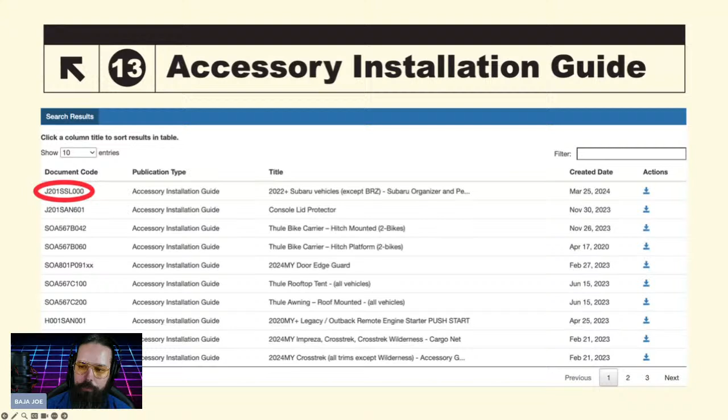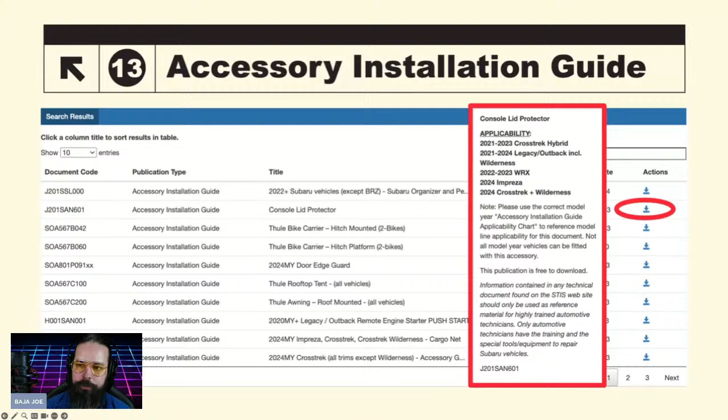For the accessories, the document code is the part number. So if you buy a particular accessory, let's say a trailer hitch, just put the number of the part up here and it'll start auto-populating what you need right there, on the fly, without hitting the return key. Then you can hit the blue down button, and that is the download. It'll download straight to your computer as a PDF file, and it's yours to keep—there's no licensing for it. Also, if you hover your mouse around the download button, you'll get a dialog box that pops up with a quick bit of information about the applicability to the vehicle and a little summary of what's going on.

All right, so I filtered down the results to owner's manuals. There it is, 2024 Outback Owner Manual. We're going to go ahead and click on the down button, download it, and let's open it up. Let's talk about the other things too.

This is really good in case you buy a used car. Sometimes you buy a used car from wherever—Facebook, Craigslist, OfferUp, five and dime shops, buy-here-pay-here—and the documents for your vehicle may not be in the glove box where they belong. So here you can find all the missing supporting information. You get your Starlink owner's manual, a quick start guide, and a quick start guide for how to use EyeSight. EyeSight is our ADAS system, our assisted driver system with the stereo cameras. There's some really cool features with EyeSight that make the driving experience better, and it has instructions on how to turn off some of the beeps and boops so you don't have to hear that thing every time you take your eyes off the road.

So we're opening up our owner's manual right now. Let's go ahead and take this from the perspective of a service technician. A car comes into the garage and the customer says, 'Hey, my remote start doesn't work.'

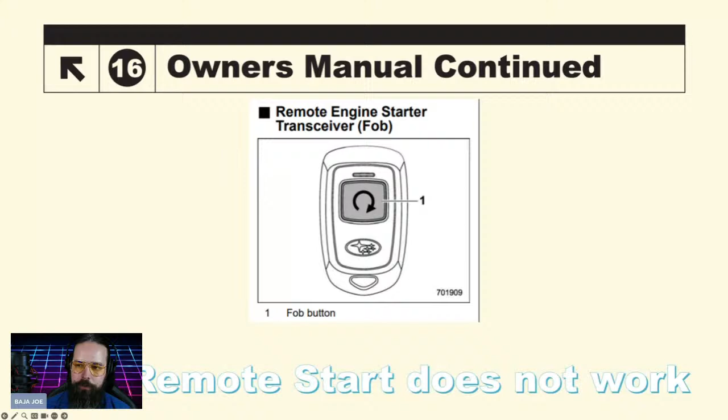With this particular type of remote start, it actually says to start the engine with the remote engine start system, briefly press the lock button twice within 2 seconds. This is the push button start key fob - it says you've got to press the lock button twice, then press and hold it for 3 seconds. Over here, with this one, you just press it twice fast and your car will go beep beep.

There is a third option to remote start the Subaru systems, but it does require a Starlink subscription, and now you can do it from a phone app. A lot of the newer Subarus are giving out a 1-year subscription of Starlink already, and then the customers get their remote start and they're like, 'Hell yeah, I can do it from my cell phone.'

Then the 1-year subscription runs out. They think the emails they're getting from Subaru are junk mail, they delete them, and then they come into the shop and say, 'Hey, my remote start doesn't work.' And a lot of technicians start looking around, thinking, 'Well, maybe your remote starter module is bad.'

Well, in order to do the remote start from this key fob, you need a module. But if you want to do remote start from your phone, it just piggybacks off of the telematics, which is Starlink, and there is no module. So all these customers that have been buying cars for the last 3, 4 years are remote starting through their cell phones. They love it.

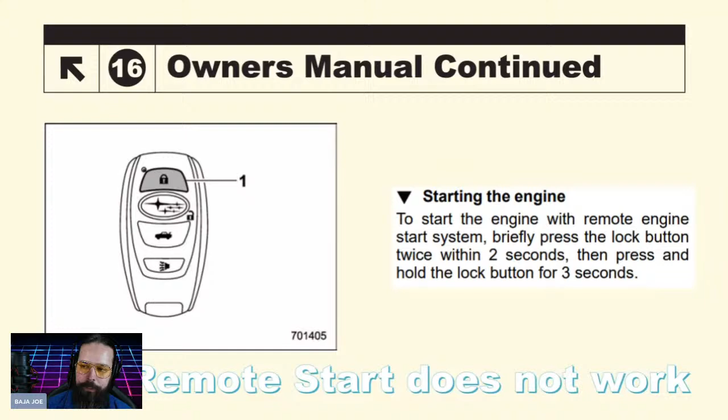The owner's manual also has operational indicator lights to tell you that the key fob and remote start app are working on the vehicle. It'll tell you what lights are going to flash on the key fob and how the vehicle is going to respond. Really good information, and you can access it all free instantly and explain it to the customer. Unfortunately, you'd probably pay somebody anywhere between $75 and $150 as a diagnostic fee to read your owner's manual. So if you're a vehicle operator, I just helped you out.

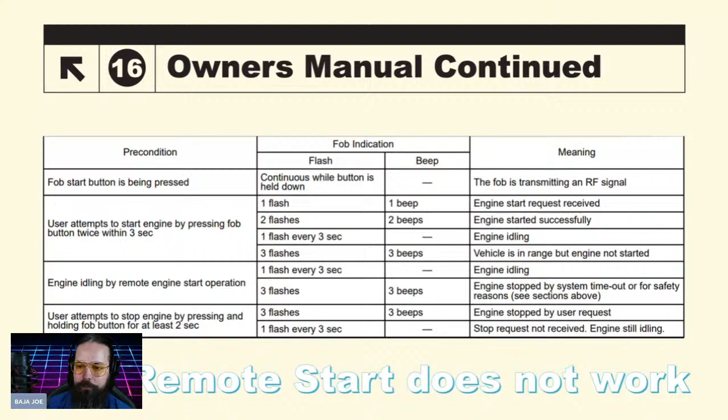All right, so now we're going to get into the full access portion here. This is where we're going to dive deep and get into some really good information.

To reiterate, you do need a subscription in order to access this information, unless you're a dealer technician, in which case you already have your dealer login. It's all the same thing. If you buy an individual STIS subscription, you are getting identical information to your dealer service technician. They don't get anything else. There's no difference in this website, no difference in the service information. Both parties are getting identical information.

So you've logged in, and here's your main page. This is a screenshot of my main page, and you'll notice it's broken up into four very good quadrants: What's New, Quick Reference Search, Recently Viewed, and Saved Reference Links. That's my favorite one right there.

We're going to talk about each one individually. So right now, let's go into What's New. This is just like the previous screen where it's going to show you the last posts, or all the posts, in the last 90 days.

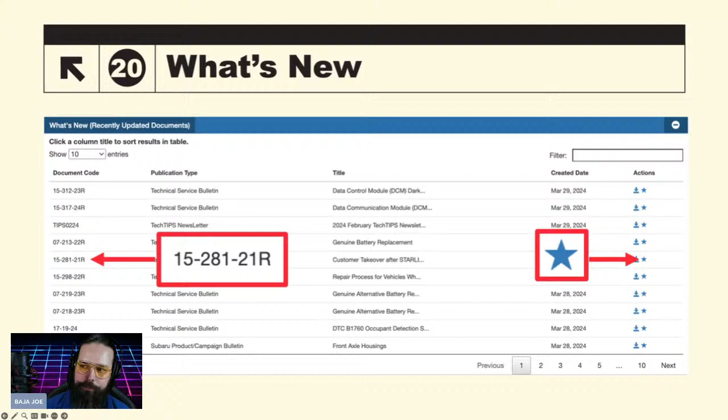Notice how this document code—this is a TSB—has an R at the end. That means revised. So this is an older TSB that was issued over a year ago, but when they make a revision, it repopulates into the What's New section.

So if you're trying to stay up to date on what's going on with Subarus as a Subaru technician at a dealership, open this up and check it out, because they'll highlight everything in yellow that they added in. What they're adding in can be anything from expanding the bulletin to more vehicles.

Maybe they changed some verbiage because it was confusing—the people who write these are Japanese and then translate it to English, and sometimes the translation doesn't cross over well. Maybe the procedure they wrote wasn't straightforward enough and too many people were asking for help interpreting it, so they'll rewrite it. Or maybe they just want to change the labor time, because at the end of every TSB there's a labor time for the repair, and sometimes they underpay the technician. Then us technicians send in claim forms saying, hey, this took an extra 30 minutes to get done—here's why, your bulletin didn't take these things into consideration.

Or maybe we tell them, you gave us a bulletin for repair, but it requires removing some parts, and because the mileage on this TSB is so big, we've got to put new parts on, and the shop can't pay for it. The customer can't pay it. You should pay for it. So they'll change out the parts bulletin and might add notations saying the dealership can claim nuts

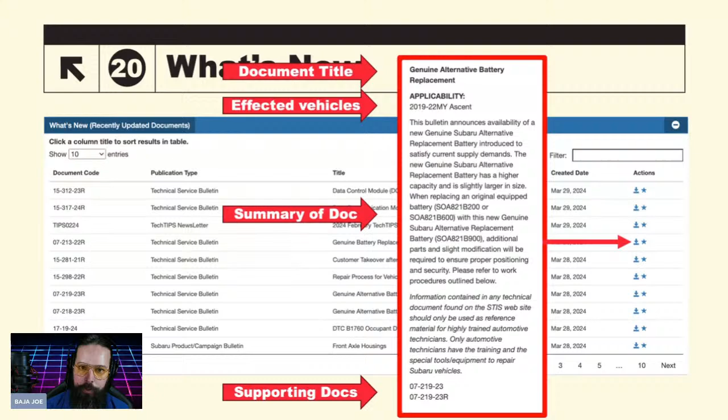All right, so we're going to jump back to the main page right now and check out quick reference search. But before we go into that, let's catch up on chat.

Yeah, we're okay because I'm actually using an individual login right now, so we're not having copyright infringements. I checked in on this. This is purely for training and reference use only, and we are not showing it, I will not be opening up documents. This is reference use only. What he's referring to is on every one of our recalls and TSBs there's a disclaimer that says do not duplicate this, because this is controlled information. So I'm teaching you how to get access to it with a paid subscription, and that is legal, but I will not be displaying anything you can't get for free. In the beginning I showed you how to get free access with the accessory install guide and the owner's manual, that's all free information you can get on the internet yourself. If you want access to TSBs, recalls, programming files, and service data, it's paid, and I'm going to show you how to get there, but I will not be showing classified information. So, thank you for being cautious.

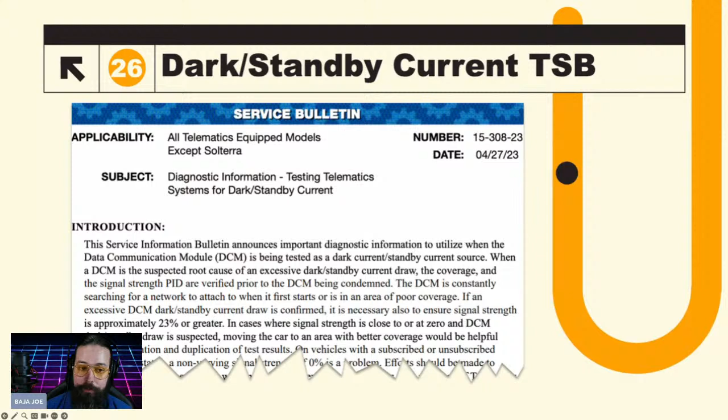If you type in dark current, we get another result that wasn't on our last list. There was a big verbiage right there, and that's actually a procedure. I cut this information off because it's classified, but basically it's the same stuff our National Highway Traffic is talking about. It's a test procedure to determine if the data communication module is keeping the network awake, and that can be fixed with a software update. You don't have to replace the module.

All right, let me reset my brain. So this last part of the quick reference search box is looking for a specific document.

Now don't treat this like a Google search. It's not going to autocorrect you and it's not going to give you suggestions on what it thinks you were looking for. It doesn't have an AI behind it. It's just going to be a yes or no system. So if you type it in wrong, it's going to show no results. Make sure you typed it correctly, make sure you use all caps, make sure the spaces are in the right place. Be very specific with what you type in there.

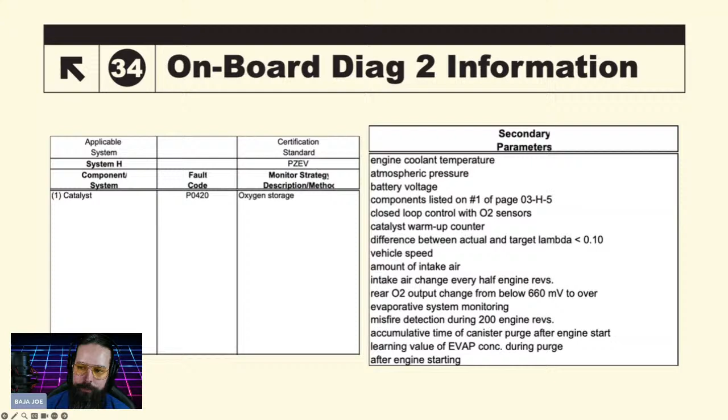One example was an oil control solenoid. The customer, I think it was a 2012 STI, kept throwing a phaser code for one of the exhaust banks. It was really eerie. He had already replaced his exhaust phaser, and then he had replaced his engine control module. I only figured it out by talking with a tech line representative who helped me learn some of this old information. He said, 'Let's go into Mode 6, but let's use this old 2006 information, reference it, and see what the Mode 6 value was.' Come to find out, all he needed was an oil control solenoid for that circuit, and the problem was fixed. It was a pretty cool learning moment for me, and I was really happy to work with that individual.

So again, knowledge is power. Read everything, learn everything. Yeah, sometimes I take my work home with me, and I gotta read up.

What am I putting out here? I might have written this one high on some coffee.

Voltage is the same, heater circuit. Okay, so the set condition - I'm showing two different vehicles here. We're referencing a 2020 versus an older vehicle, and the code set criteria are just getting much tighter now on newer vehicles. You can also get a Mode 6 spreadsheet.

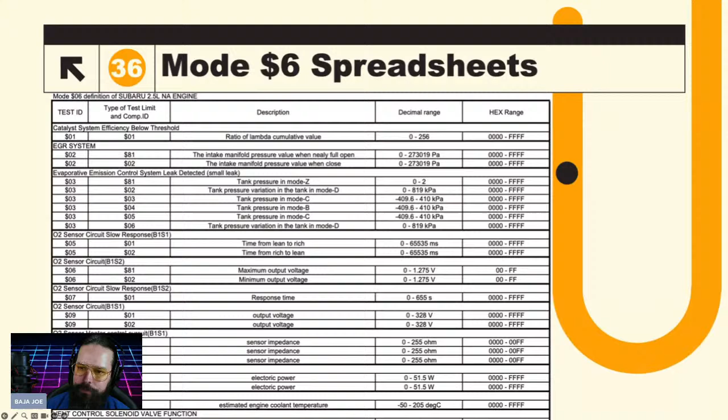Okay, we're going to talk about your tech reference booklets. If you are a small shop getting Subarus in and you don't know how to work on these Subaru transmissions, we wrote a whole book just on CVT transmission diagnosis, with working examples in there too. This is a really, really good book to read. You will very much enjoy it. And I went through that book in my CVT training course.

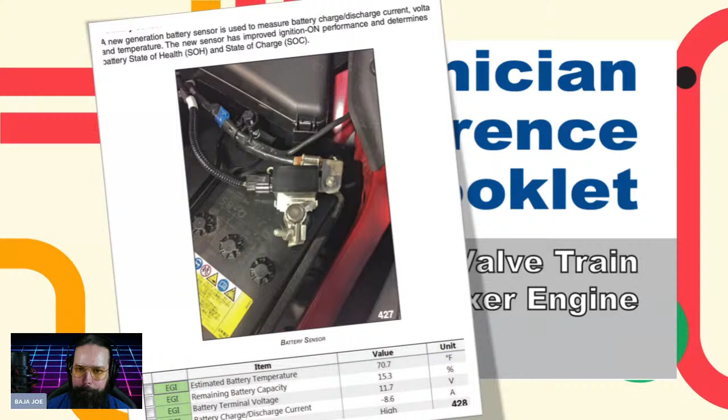Oh, that didn't go to the top like it should have, so we're not seeing the pages getting mentioned behind it. That sucks, so I'll fix that in the slide update.

What I'm trying to show in this graphic is if you open up the engine book for chain driven engines, there's going to be a better explanation on how to remove and install the chains. That's really cool, and they give you an Excel spreadsheet for the pre-measured shims.

Okay, these FA/FB engines that use chains now for the timing, timing chains, we no longer have the little nut and screw to adjust the valve lash. Now you have to use these pre-measured little shims, okay?

And when you find the measurement using the formula they talk about for what shim you got to use, they're giving you the part number to go with it. That's great, because when you go to the parts counter and say, 'Hey, I need this shim that is 2.7 millimeters,' he's going to go, 'I don't know how to find that.'

That happens sometimes because maybe he's not familiar with how to use his catalog. Now you can just walk up to the counter and say, 'I need this part number,' and you get your shim. So they got a book for all the types of engines, the EZ30, EZ36, the FA/FBs and the EJs. Great information in there.

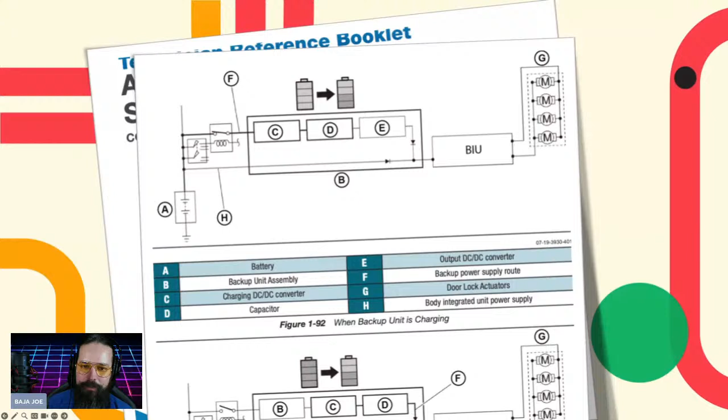There'll also be immobilizer information in there, all kinds of great stuff. I love it. So let's catch up on chat and let's go right into spin the wheel.

Engineers were meant to be served by mechanics. I didn't catch all that. So yeah, engineers and mechanics, we butt heads a lot.

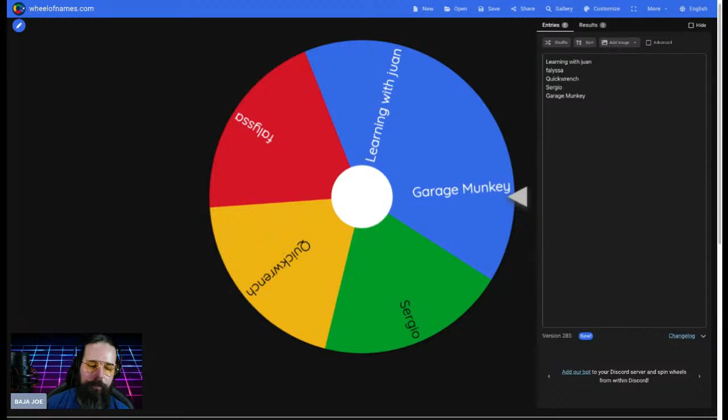Garage Monkey, are you still in the chat with us today, sir? Give him a minute to chime in there because there's about a 30-second delay.

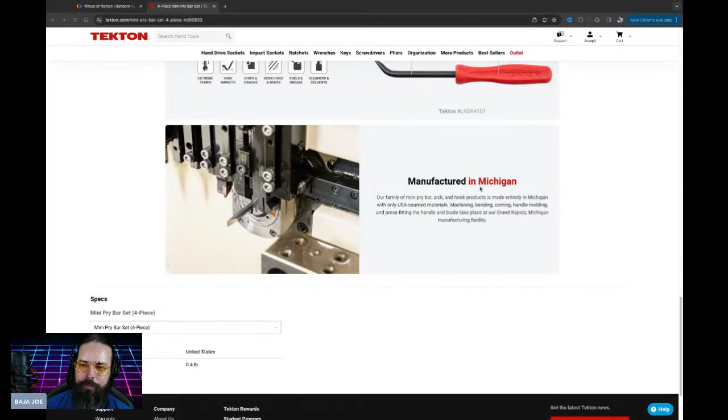So our prize today will be the 4-piece mini pry bar set from Tekton. These are really, really good tools. You get one with a thick shank, one with a skinny shank, so a 1/4 inch and a 5/32, multiple angles, 30-degree and 50-degree on both sizes. You get a plastic handle that resists all the fuels and oils in the shop. I actually tested this myself, left one in some ATF for about a week and it didn't even phase it. I don't know how good that's doing for landfills, but most importantly, it's an American made product in my home state of Michigan, so we are supporting American tools. The steel on these things is great. I've had a set of these for a year and the tips still look brand new. A little bit of the black oxide came off, but still a good, nice, sharp tip.

Sergio won a set a couple weeks ago.

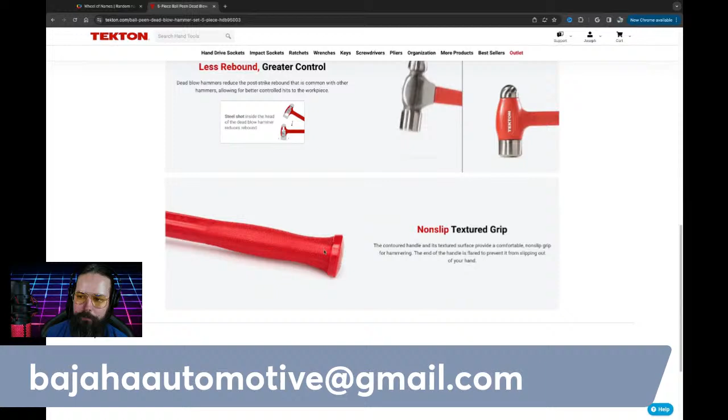They just recently did a redesign. Now they have a steel face, so you get a ball peen. Looks very much like Snap-on, but these are not Snap-on. But if you go to the Trusty Cook website, I see a lot of similarities, so I think they're buying them through them. But guys, you can't beat those prices. To get a full hammer set for 300 bucks shipped, that's every hammer you're going to need in automotive and many, many more. They make it in a 50 ounce, and that thing is a destroyer. It is a destroyer.

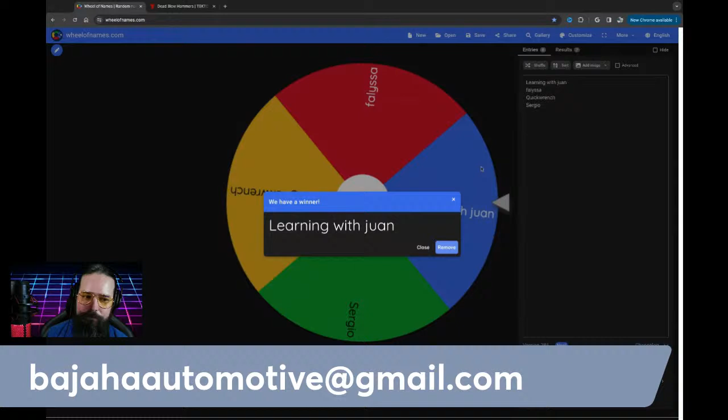Catch up on chat. Yeah, yeah. Michigan, you guys are talking about something. I don't know what you have.

Did they? Yeah, you know who the person to always find out who makes what is CP. CP, the tool guy. I don't know how he keeps all that information in his head, but tools are his thing, and he can tell you everything about where every tool was made and who farted on it.

Had a Tekton socket set when I first started. They were good. Sucks. Oh, bummer, dude. Well, I hope I get enough members that I can start giving out full socket sets.

That is one of the reasons why I pushed the Tekton brand versus the Harbor Freight brand. Because if you had a full set of sockets and one of them walked off, you drop it somewhere, you leave it in a car, you can go buy an individual socket. You can't do that at Harbor Freight, you're stuck buying a full set.

So when you start getting a lot of tools, you kind of get that little voice in the back of your head that says everything has to match. That is the worst condition you can have as a tool owner, when the tool truck guy says, 'Hey, we sell pliers in blue,' and you're like, 'Damn it, I like blue, and all my pliers are yellow and green. Trade them all in, I want all blue pliers.' That is a horrible thing to have.

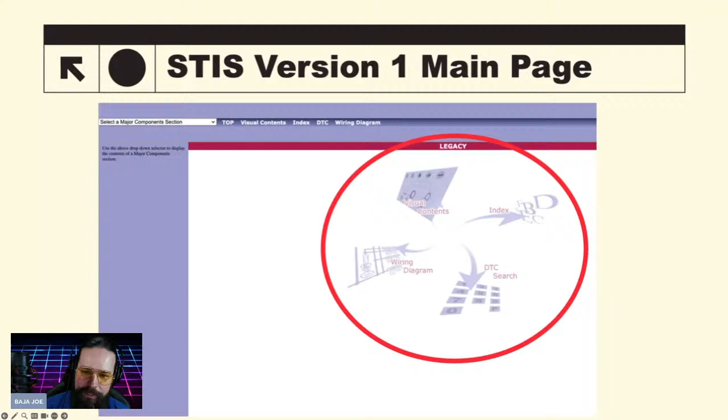This top button right here, no matter where you go in this catalog, if you hit that top button, it's going to take you back to the main page. So your first attempt at trying to use this, you're going to get lost, and if you get lost, just hit top, it'll take you back here, you'll be all right. Now we have 4 buttons right here, this is not a wallpaper, these are actual buttons you can click on: visual contents, wiring diagram, DTC search, and index.

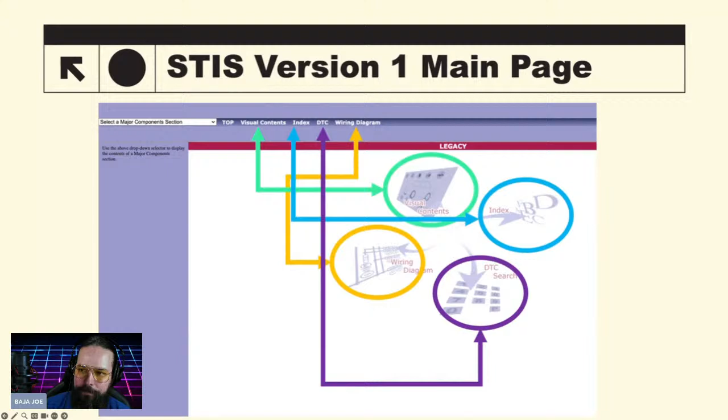You'll notice that each one of these bubbles populate to these blurbs here at the top. So if you're somewhere else in the catalog and all of a sudden you want to bounce over to the wiring diagram, you can do that.

Then you have the drop down box, which will allow you to select specific systems. I'd consider this more of a pro user approach. If you're already familiar with the system, and I'll talk about how to navigate through it, you can start digging through each individual thing you want to do.

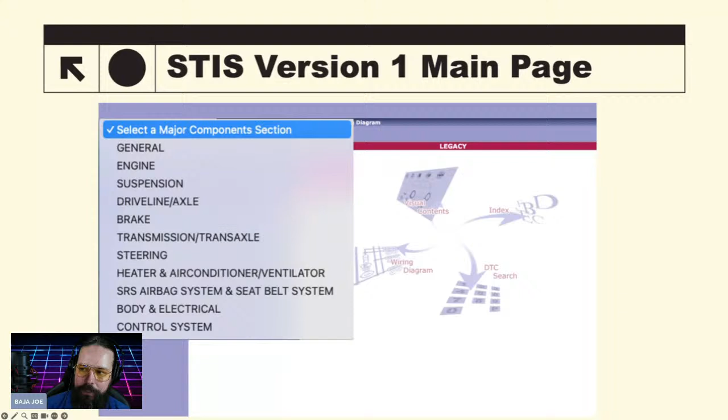All right, let's go into visual contents and see what's going on. As soon as we go into the visual contents page, they bring up a graphic of a generic looking car. So if you're looking at an Outback, you'll notice it's not an Outback. If you're looking at an STI, it's not going to be an STI. It's just going to be a plain Jane Subaru, and Subaru does that with a lot of their manuals. Unless they need to show something specific, there will always be a generic outline of a car.

We get some pretty little pictures here. This symbol is going to be an engine. This is steering, this is our airbag SRS system, our HVAC air conditioning system, cooling system, body and chassis components. This battery represents electrical, not just the battery or charging system, but all electrical components. Then you've got transmission, suspension, and braking system.

So if you click on the engine button, it's going to populate a list of selectable categories that you can go from. Pretty cool. So if you wanted to go into fuel injection system, there you go. It'll take you straight into another subcategory of fuel injection.

Keep aware of what's in the parentheses. H4SO, that's an H4 engine, a flat engine with 4 cylinders, single overhead cam. H4DOTC, 4-cylinder engine in an H configuration, dual overhead turbocharger. H6DO, 6-cylinder engine with the piston configuration in an H. So everything's a boxer engine, guys. Boxer engine, 6-cylinder, dual overhead cam.

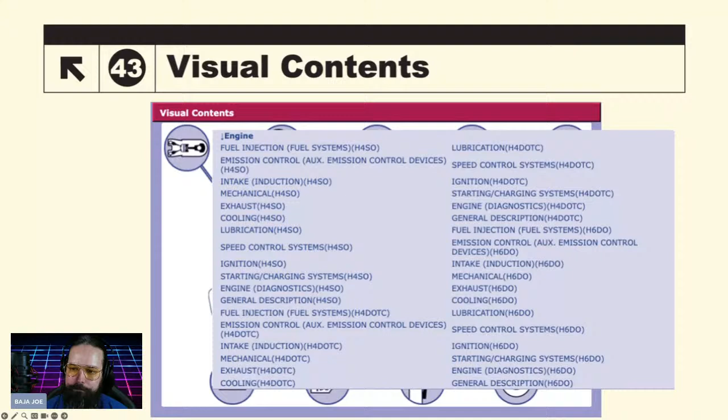The reason why there are all these different options is because this Outback has three different engine setups it can have. It can have a four-cylinder single overhead cam - we call that the grocery getter. You've got your turbo engine, a turbocharged four-cylinder with dual overhead cam, and then you've got the badass EZ30 six-cylinder dual overhead cam engine. So when you want to look at something for the cooling system, make sure you're picking the appropriate engine classification, or you're going to diagnose the car wrong, or not find what you're looking for.

In steering, power assisted steering, it's very simple. They're going to show you a power steering pump, the power steering rack, and so on and so forth.

Okay, we've got this seatbelt and airbag system. So there's our different subcategories that you can go into.

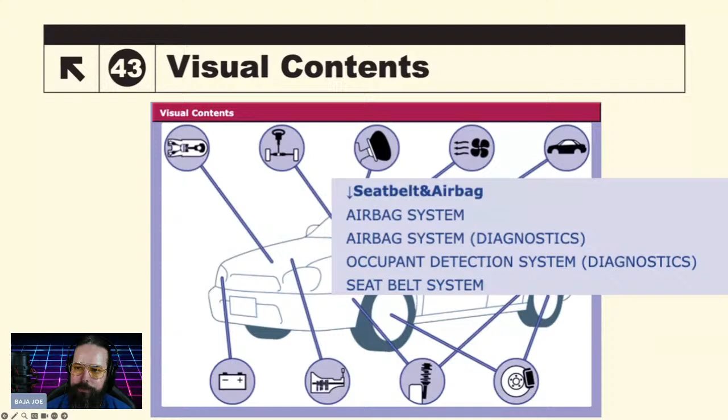Air conditioning, HVAC, and you've got your auto AC if the system does have it available. So make sure you're selecting the correct type of AC system that you want to diagnose. Does it have manual control AC or auto control AC? If it has auto control, it's going to have a button that says auto on it.

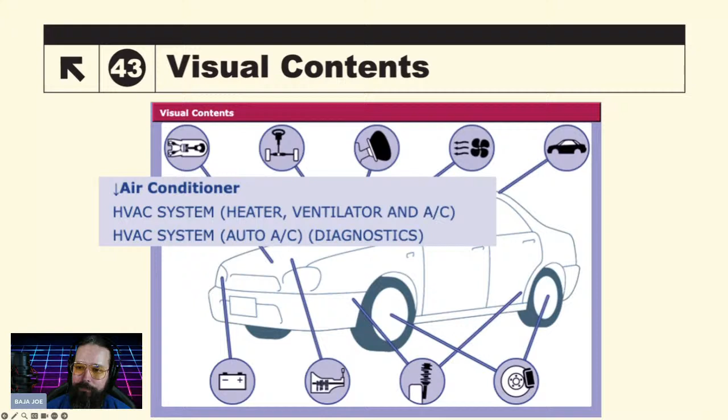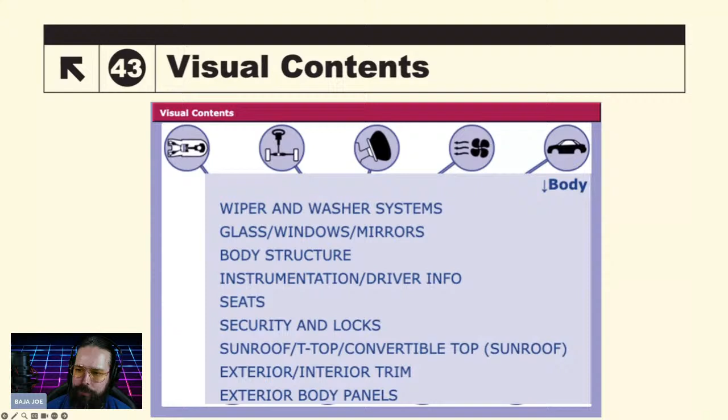Body, that's for your glass, body structures, seats, security systems, sunroof, so on and so forth, oh yeah, trim. If you are a body technician, if you work in a body shop, there is a separate manual. I didn't even think about adding that, but you would not find any of your body shop stuff in here - that's a separate document.

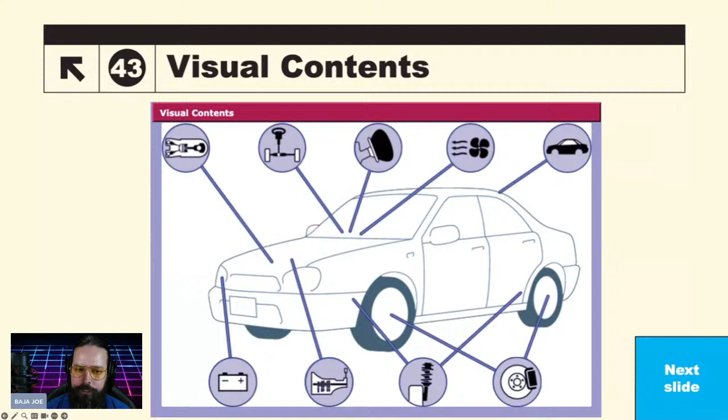So I'll update this. Electrical, lighting systems, entertainment, communication, tires, so on and so forth, cruise control, LAN system diagnostics, and wiring systems - those are your schematics. So if you want a wiring diagram, that's where you can go.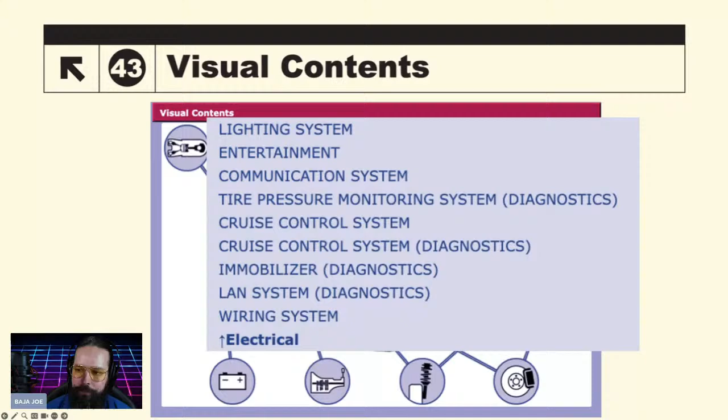Transmission - again we've got some information in parentheses. You have a 4-speed automatic, a 5-speed automatic, 6-speed manual, 5-speed manual transmission. Be aware of the categories that you're going into.

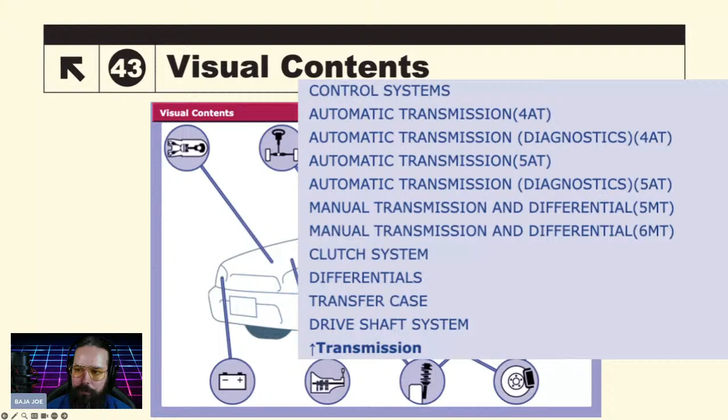Clutch differentials, transfer case, and drive shaft system. Front and rear suspension, wheel and tire system, brakes - this is where you're going to find your ABS with diagnostics. Not all these vehicles do come with a VDC system in them. If you go way back into the Subaru timeline, not all of them had VDC support.

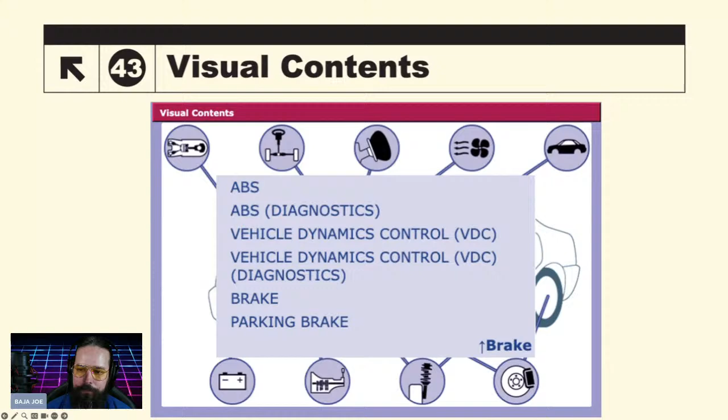All right, so now we're back at the homepage.

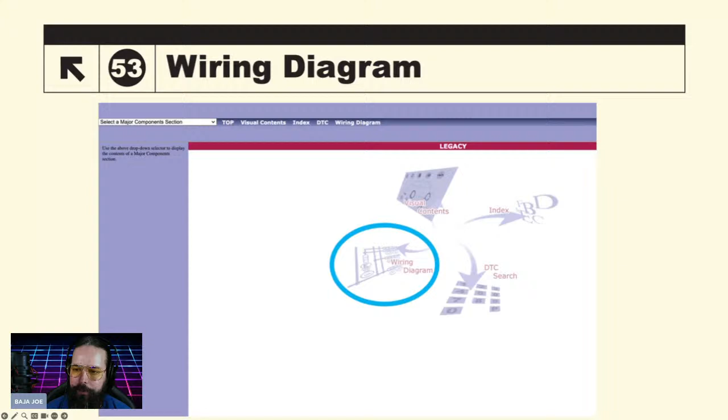We're going to go into the wiring diagram to see what's in there. When you click on that, you get an index of wiring diagrams. It immediately starts on the letter A, and you can choose which category you want by clicking on the letter you need.

Notice here that I left this intentionally, but you can't see the T. You have to really carefully hover your mouse over this line until the icon changes, and then you can move it over. This is just a programming issue with the browser and website. You can still kind of click on the T, but get used to that. That's going to be a problem with these interactive catalogs on the Subaru side. Same thing here, these buttons are overlapping. It's just a browser compatibility issue, and they're not doing a lot of updates and support on this old architecture anymore.

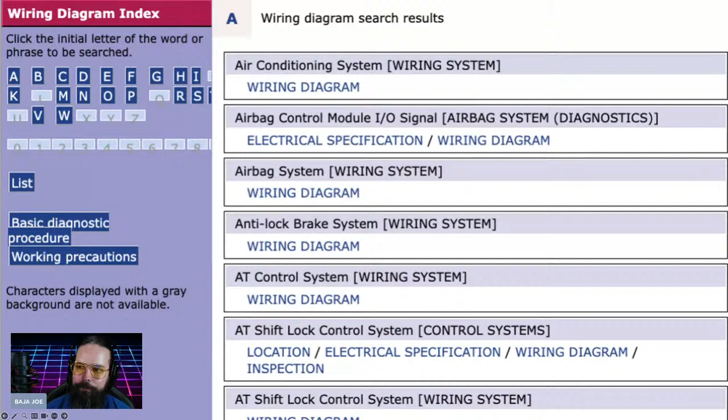All right, so there's your letters. Click on B, hey look, you get B. Now we've got the backup light system wiring diagram with inspection, bulkhead wiring. So shop around the different letters for what you're looking for. If you were looking for a wiring system for your reverse light, it's obviously not going to be under R because Subaru uses the phrase backup.

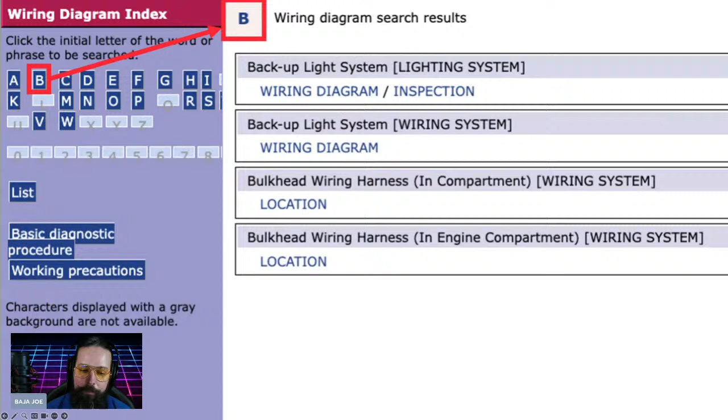Yeah, I got to fix that. All right, so I clicked on S, just making more examples there.

Now that you've picked a wiring diagram you want to go into, I'm showing the seatbelt warning system just as an example. Notice how low resolution this is. That's because, as I stated before, this whole website is a GUI, a graphic user interface, for a 6,000 page PDF document.

That document is hundreds of megabytes, so they made this interactive program to search it better. What you're getting here is a thumbnail, a very low resolution view. You can't even see some of these letters, you don't know what these numbers are. So what you have to do is click on that PDF icon.

Also, point out that this top header field has updated to show you where you are at in the service manual. So we're under body and electrical. This is our file path structure, again showing you your final destination.

This is all really good because when you become a power user, it can help you navigate these files a little bit better, and you don't have to use what I call the wizard. If you were a Windows 95 guy, you'd know what that means, but you don't have to use the wizard anymore.

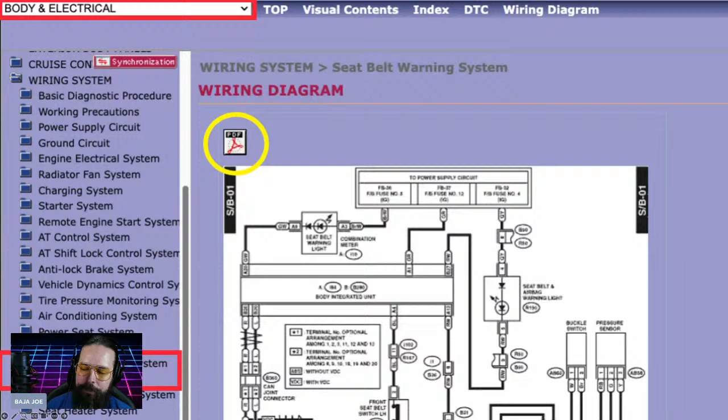All right, so you open up your PDF, you're going to print it, and you'll get a nice little pop-up.

I got a lot of chat in here, let's see what chat says. I have personally used tools, Harbor Freight has been pretty good. Oh okay, we're still talking about tools. I like to say the engineers hate technicians with how stuff is arranged in engine bays. That is an ongoing discussion. Yes.

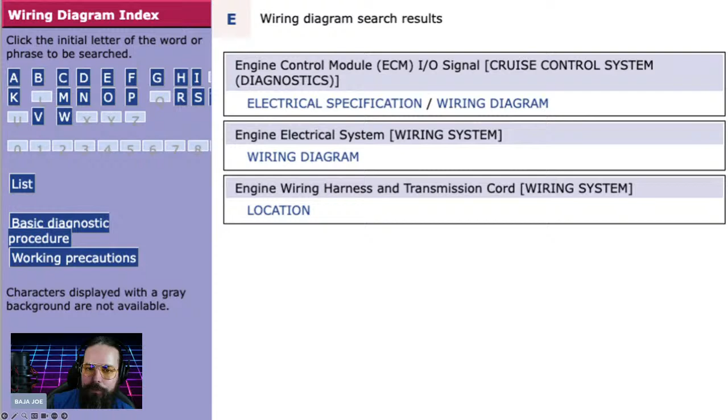Okay, let's look at a larger wiring diagram. Let's go into the E category. Engine wiring harness is about the biggest one.

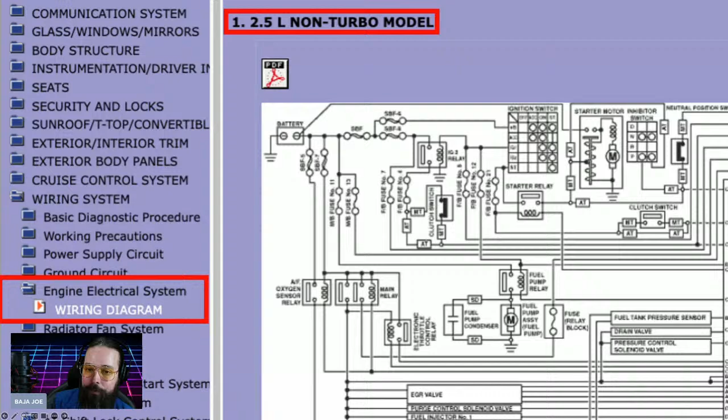So immediately, we're going to reiterate the fact that this vehicle has multiple types of engines in it. It's got a non-turbo, a turbo, and a six-cylinder engine. So look at the heading for what engine you're working on. There's going to be extra electrical components you'll need to reference, and not all these color wires are going to be the same.

Now it's updated to a turbo because I scrolled down about 10 pages. When you're looking at the documents, they'll always have a little header on the side that can help you identify where you're at. So you're in a four-cylinder engine, you're on page one. EG stands for engine.

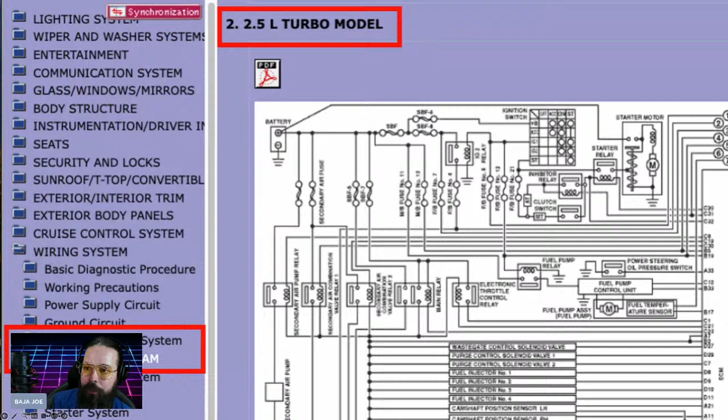Let's say you want to print out all 10 pages, or you want to view all 10 pages. Well, you're going to have to click that PDF icon on each individual page. That kind of sucks. And so you're going to get multiple pop-up windows. Now, keep in mind your browser might have a different setting for when you click on that PDF icon. On some browsers, it'll open up a new tab, and on others, it'll just open a separate window on top of your regular one.

So you might have to change some of your browser settings depending on what you want to do. If you want to print a 10-page engine wiring diagram, you're going to have to click on that PDF 10 times, as I said.

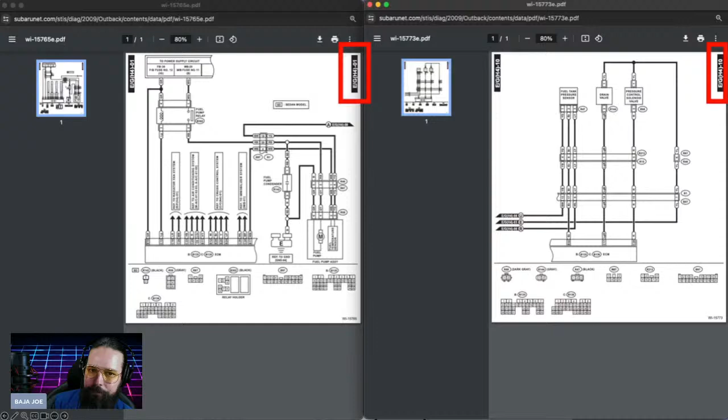And why does this happen? It's okay. So I was talking about the tabs. You're getting different pages opening up. So is there a workaround for that?

Yes. If you don't want to do all that clicking, I'm going to show you how to go get the actual source information. If you want to see that 6,000 page manual, we're going to go back out to the main page, click on service manual, plug in the car you want to go into or plug in the VIN, and it'll auto update for you.

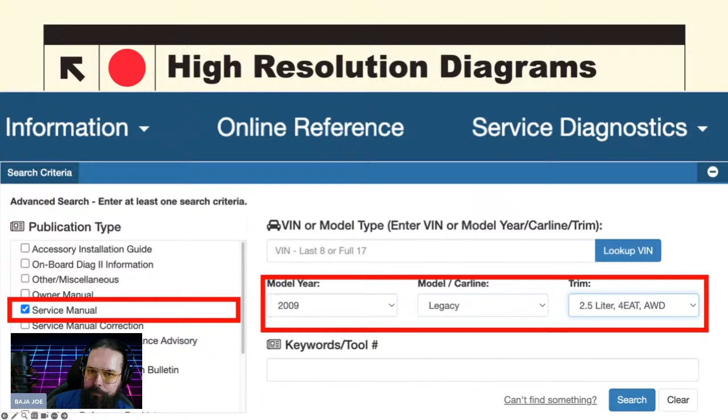Hit the search. There it is. Legacy Outback Service Manual. Click on download, and now you got your document.

Now this document has multiple sections in it. Just this one document is 500 megabytes. On my high speed fiber connection, it still took about 10 minutes to download at 2 o'clock in the morning. So if you're on a mobile Wi-Fi connection, like doing mobile diagnostics, this isn't going to download very well - it's going to take a very long time. And if you're using the local Wi-Fi at your garage, it probably sucks and it's going to take a lot longer. So be patient, plan ahead.

And that's why we have the interactive catalog, so that way you can view things faster. This is a last resort.

So right out the gate, I want to talk about this one heading right here. It says quick reference index. Uh, let me not get ahead of myself. Okay, I got to follow my notes.

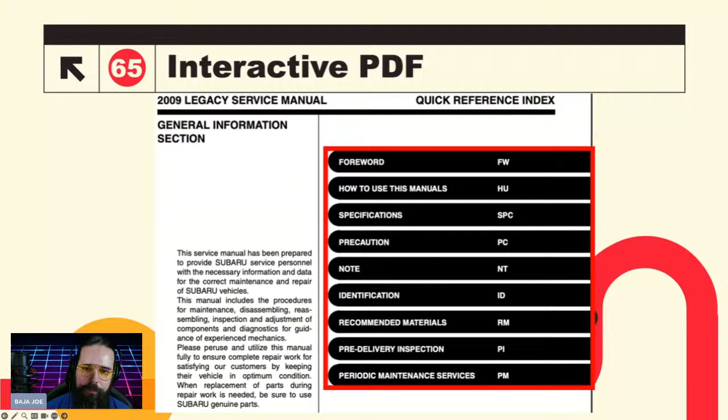Okay, so first off, here's a warning. When you open this up, it's going to download this document into a temporary internet folder. This is just computer geek talk right now, this isn't car talk. When you click the PDF to download this 500 meg program, it's going to open up in an internet browser and store that 500 meg file into a temporary folder. And as soon as you click close window, it's going to delete that file.

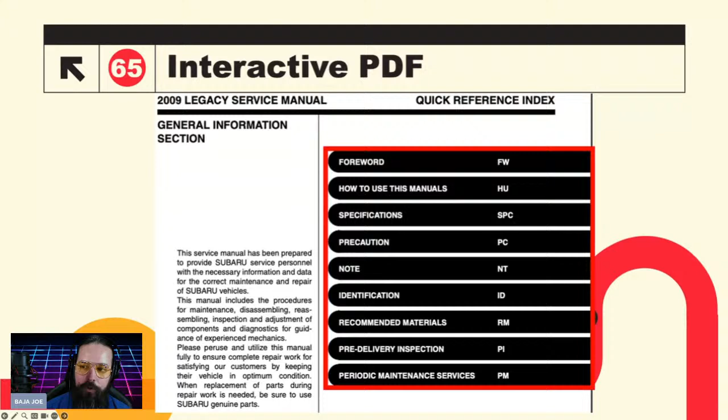So it's like RAM, it's not ROM - it's in your random access memory, not in your permanent memory on your computer. You're going to still have to go to the download button on that pop-up window to download it to your desktop so you can save it.

So I'm highlighting this portion right here because all these black tabs - these are actual buttons. This is a program PDF file that is interactive.

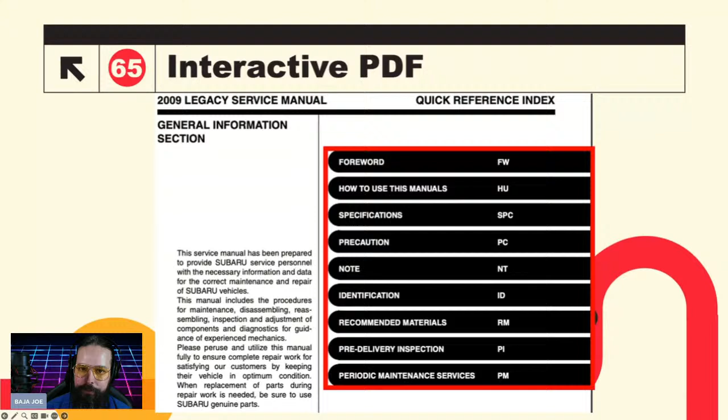But you'll notice that, hey, that's got some funny business on there and that doesn't reference anything I need. Where are my wiring diagrams? I came here for wiring diagrams. Well, wiring diagrams - if we scroll all the way down, we get into a whole another quick reference index on page 127.

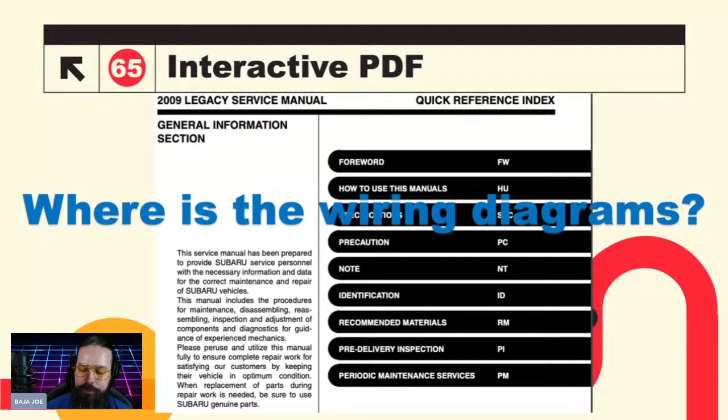So why didn't they put another table of contents on top of this table of contents? Well, it's because this 6,000 page document is about 20 different sub publications put together. They just forgot to put another thing on the top, I don't know. I didn't make it, but I'm telling you how to navigate it.

So what do you want to do? You're going to hit Control F and look for - you want to type in quick reference index. Type that in and you're going to get about 9 results, and then you can scroll those results really quickly. And now you're going to find wiring systems. Hooray! Be aware that if you misspell anything, it's not going to find anything. So we find wiring systems on page 4,873. Ta-da! Control F is your friend when you're in this document.

Then we can scroll down and now we can see the different subclasses of wiring systems. The other thing I want to point out too is each one of these index systems, these little subcategories - I've got to find a name for them.

Each one of these chapters in this giant PDF document starts its own numbering system all over again. So while you might be on page 400 or 4,875, because that's what your PDF document viewer is showing you, you're actually on wiring system page 1. So your page at the bottom will be labeled WI 1.

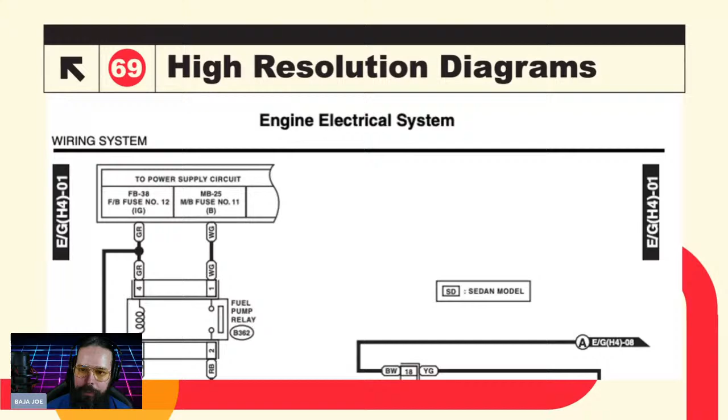So let's go into our electrical, and now we can start getting some better high res photos, and that's what we like. We want to print them out. If you're going to print them out, you're going to have to go into the custom tabs of your printer and enter in the PDF document pages. Whatever PDF document reader you're using, enter those pages in.

This preview screen may or may not update. It might take a long time to update because it's actually trying to process that entire 6,000 page document right here. Make sure that you click custom pages.

Don't get click happy, because if you get click happy and you start printing, or if you just try and do control P and hit enter, you're going to crash your home network, or crash your shop's network, or your computer's just going to lock up, because that 500 megabyte document is going to eat up all the buffer.

You're going to have to very quickly cancel the print job. I would say the best thing you can do is just go unplug your printer and then go to your computer desktop and try and cancel the print job. Be very, very patient, because this large document is just destroying your computer's virtual memory.

It is eating up all your RAM. You could have gigs of RAM in your computer, but I'm still telling you, this huge document, your processor will just all of a sudden go from idling 30% to maxed out 99%.

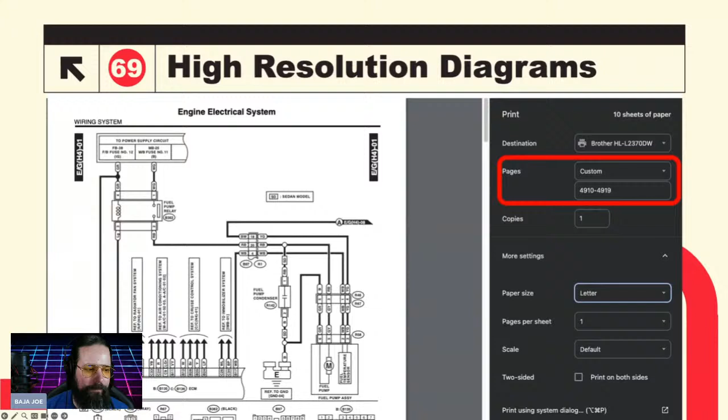We're in time, we got 10 minutes left. Are we gonna be able to get through DTC? Nah, we're gonna start fresh next week, we'll go right into DTCs. I was hoping, like, how many more do we have? Yeah, we'll kill it off. We're very close to the end.

Okay, so we're back on DTCs. We're gonna hit DTC and get into it. This is gonna bring up another interface here.

You can click your mouse cursor in here and enter in the DTC that you have, but make sure that you have your all caps on. Sometimes typing things in here, you can get an error when you hit OK and it won't give you the results. I've just forced myself to click these individual buttons to hand jam in that code.

So we're going to put in a P2098 and we get two results right here. There's our DTC, and we have two different types of reading this. It says you got detecting criteria, and diagnostic procedure with diagnostic trouble code.

So which one do we want to use? Well, we should always read our detecting criteria first to find out what parameters the computer is looking at in order to generate this code. We want to find out if the computer got fed some bad information, which can generate a code, or maybe we have a failing sensor. Good information to know. Then we can go through with our trouble tree and follow it, because our trouble tree is written as if we already read the detecting criteria.

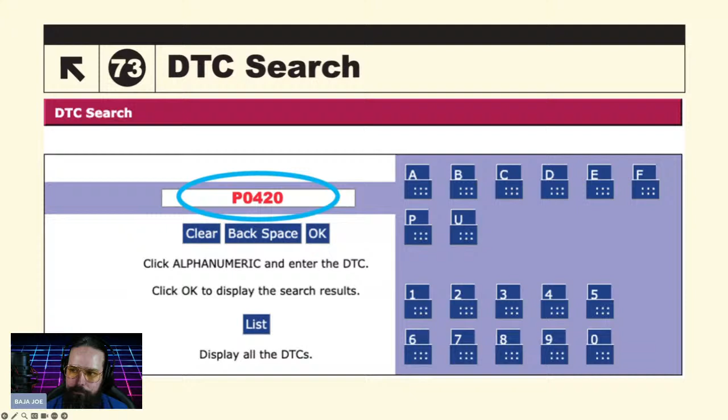All right, so let's plug in a P0420, my favorite code. And now we have three different engine setups. We got our single overhead cam, our turbocharger, and our six cylinder. We're also getting a detecting criteria and a diagnostic procedure with trouble code for each engine classification. Very cool.

But why didn't we get three engines back here on this one? Well, that's because there was no code programmed into the ECM.

The other two classifications of engines in this vehicle, the four cylinder and the four cylinder turbo, don't have post catalyst fuel trim system too lean codes. That's a common mistake. A lot of people think that codes carry over to every single vehicle, and it's not necessary.

A couple of months ago, I had a customer who came in with a 2011 Legacy, and he was getting a cam position sensor code. He had his little reader, and he says, 'I got this code. I need this sensor installed.'

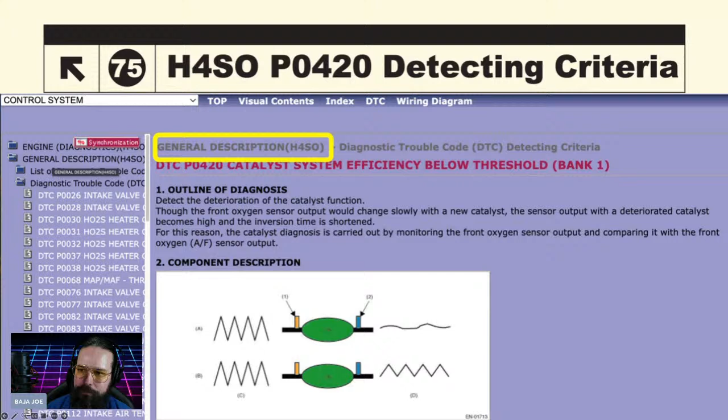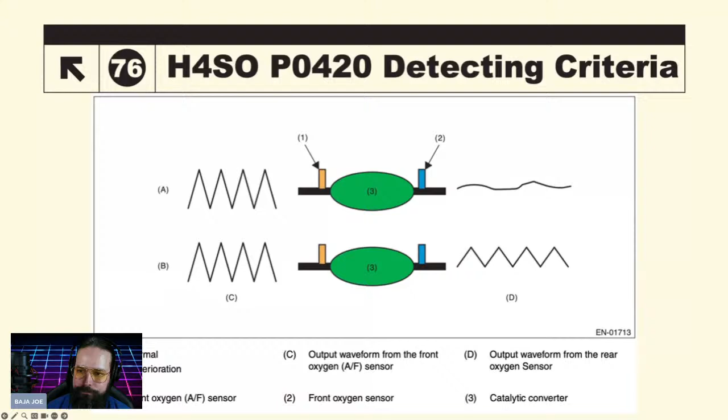Pay attention. So I went back into the PDF document and did a cut and paste here so we could see that graphic, and you can see the level of detail between those two. So yeah, a lot of times I like to go back to get those graphics because those graphics are just thumbnails and they suck.

All right, our last section here, the index. The index is very valuable. Looks very familiar to that wiring harness one, doesn't it? You got the same letters over here, and you get a new button. All that button does is just take you back to the top. So some of these sections you can scroll down pretty far. You can click back to the top, and it'll take you all the way back up. Yay.

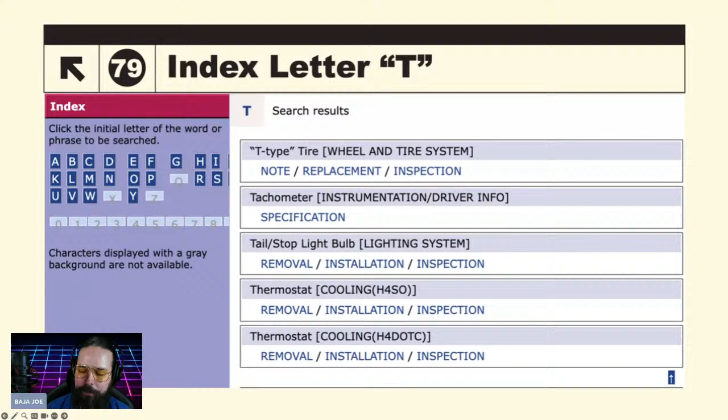There is a T hiding behind there because I told you this interface does cover over these two letters. You just got to get used to Subaru verbiage. So if you're not finding what you're looking for, click on the letter section you want and use the power of control-F, searching through all these titles, to help you out very much. Okay, there's our J and there's our T. You can't see them, they're cut off.

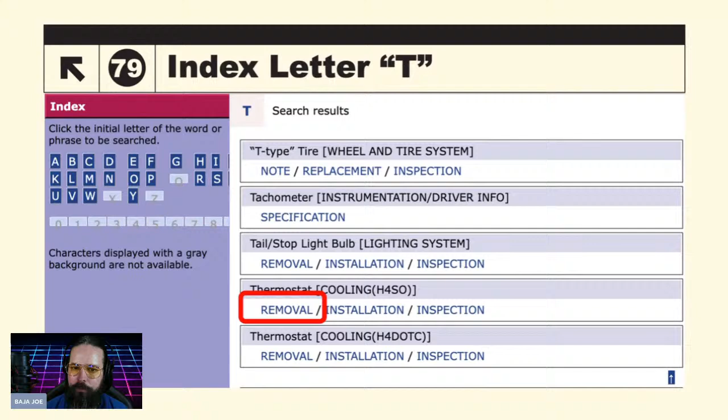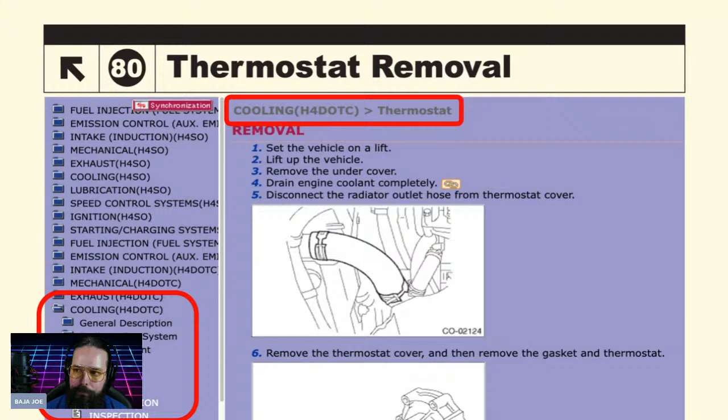We're going to explore thermostat removal. So we're looking at our thermostat removal and something doesn't look right. We don't see these components on our vehicle. Something doesn't match up, what's going on? Well, pay attention to your subfolders, where you're at. Hey, we've been looking at a single overhead cam engine the entire time. Oops, we're in a turbo now. Our bad. You're in a turbo. So we got to go back, and we should have clicked on single overhead cam.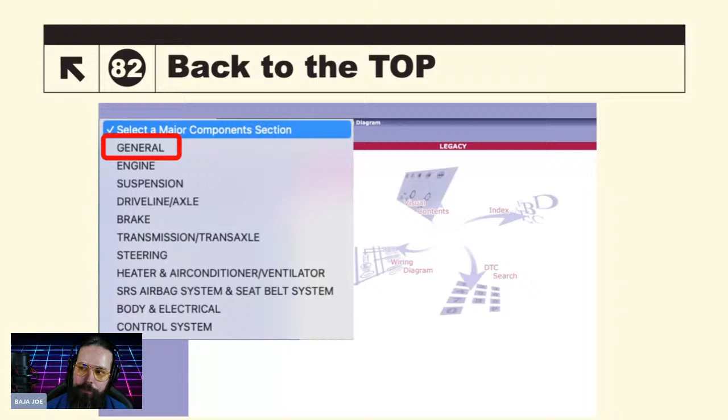Okay, lastly, let's get into this drop down box. There is some fantastic information in here. If you are flipping cars for a living, you're going to love this section. So let's go into the general tab. All right, so we're going to get some categories that were not mentioned in the big four on the main screen.

Okay, we got a forward, how to use this manual. So if you forget this class, you can go into there and get some tips and tricks. Specifications, caution, notes, identifications, so far. You can read it yourself.

All right, moving along. Let's see what's going on with the forward. Hey, forwards are always boring. They never have anything, and I always skip them when I read a book. So yeah, nothing important there.

How to use this manual. Okay, so you should explore that part on your own because there is some stuff that is important to different categories of mechanic and technician that you are. But this is the one that really stands out the most. It goes over the symbols that they like to use in their diagram.

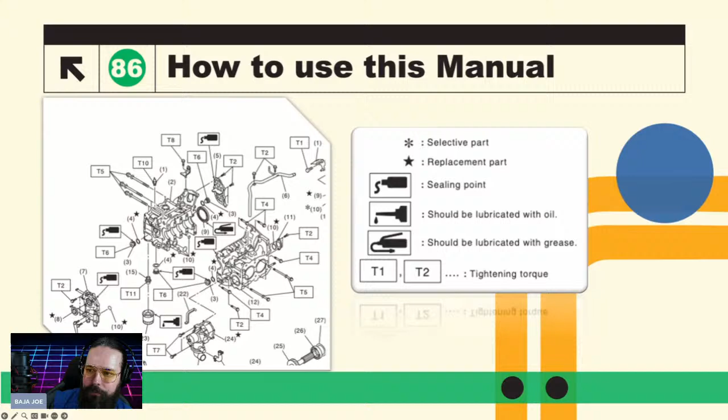So, whoa, you weren't supposed to do that. How to use this manual. And there it goes. So, yeah, this symbol is representing a gasket maker point. This symbol is a lubrication point during assembly. And this one says you should lube it with grease, not oil.

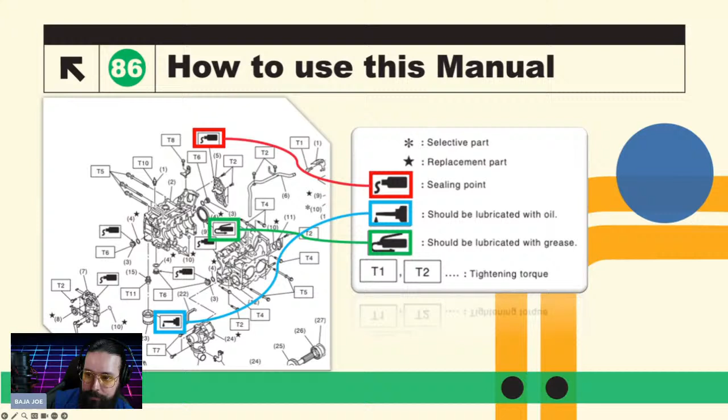And then all the T's represent torque values. When you're looking at this graphic too, on the bottom that you can't see, it's actually going to have the torque specs right there. So we'll get into that, I'll mention that, I'll have to add a slide for that. But basically, you can bring up a photo and be like, I just want to know what this one bolt is torqued to. There you go, now you know the torque spec. And if it has a torque sequence like these head bolts, it's just going to straight up tell you, hey, that's a torque sequence, you need to go to this category.

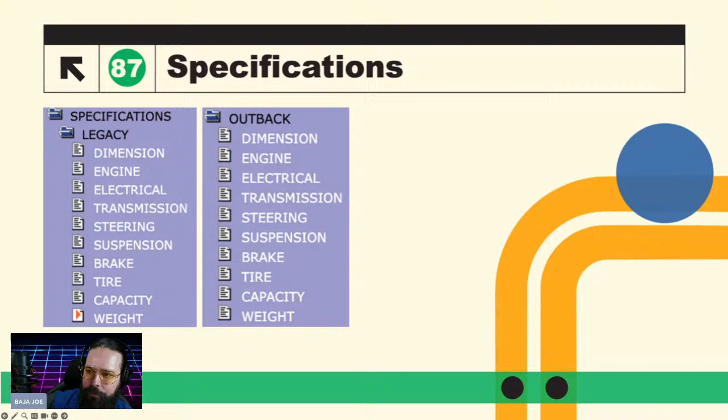Specifications. All right, so you're going to get two folders right here because this is a shared manual between the Legacy and Outback. You have your different categories of specifications. Let's go ahead and bring up just the engine right there. That's where you're going to find your firing order. Pretty cool information, some max output power of your engine.

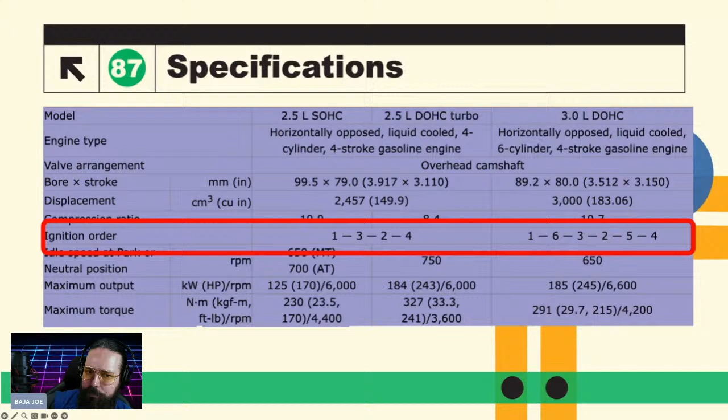Oh, is there something else in there? Nope, nothing else I want to talk about.

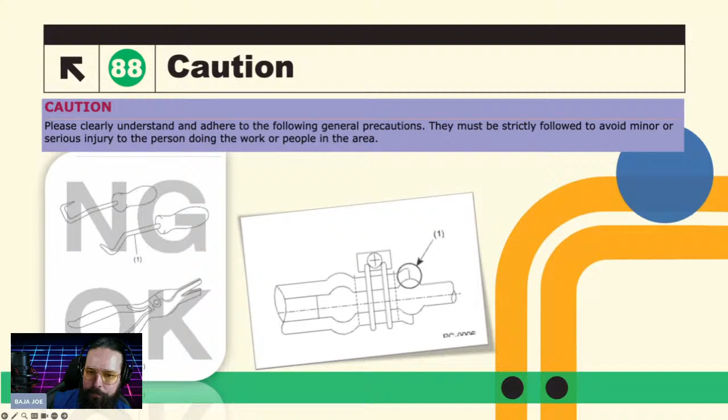The caution area, well, it might seem simple of things not to do, but there's actually some pretty interesting subnotes in there. All right, one, it explains what NG and OK mean, no good and OK. You'd be surprised how many people read manuals and come over and say, hey Joe, what do they mean by NG? Like, it stands for no good. It also gives you warnings of when you're putting hoses over barbs, how to seal them correctly, and where to put the clamp correctly. Very, very important information to know.

Let's go into our notes. I picked out a couple of choice graphics here out of the notes.

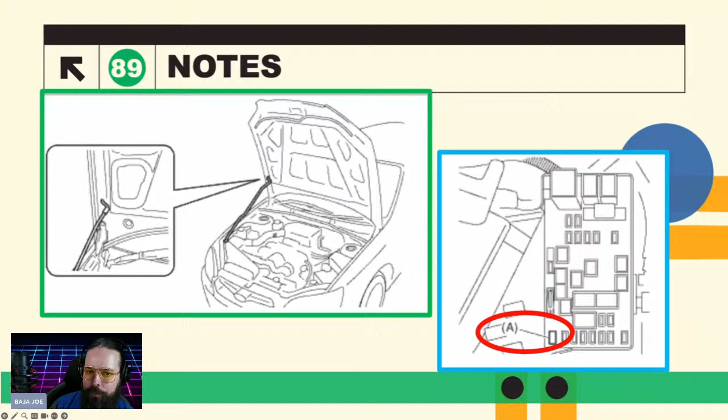This graphic is talking about how you can move a fuse over and take the vehicle out of all wheel drive and put it in front wheel drive mode if you're trying to diagnose the drivetrain.

Identification. Again, if you're buying cars at auction, or maybe you're buying a used car and you want to know, did somebody grave rob and stab Frankenstein this car together?

But maybe you want to get one used. Well, these places that sell them used, they're not always trustworthy of classifying their equipment correctly. A lot of mistakes get made, especially when the production of a vehicle gets really close to changeover.

Ford had this problem a lot with people buying used engines for the Fords, and the Fords transitioned from regular engines to flex fuel engines. So you got a flex fuel vehicle and you're buying an engine. You're like, hey, I need a 2012 Ford Taurus engine. You just type that in. The guy says, yeah, I got a whole bunch of Ford Taurus engines here from 2012.

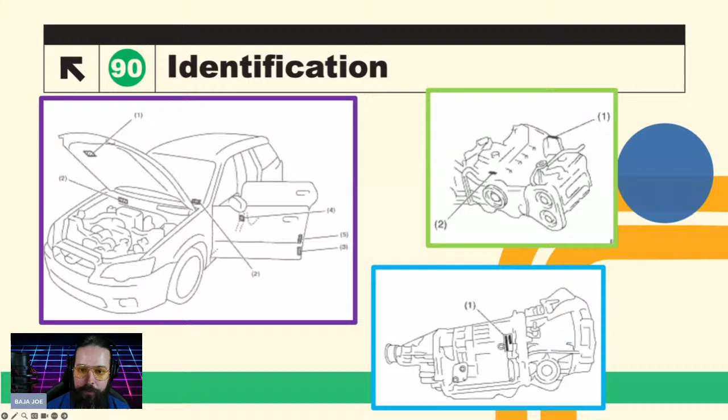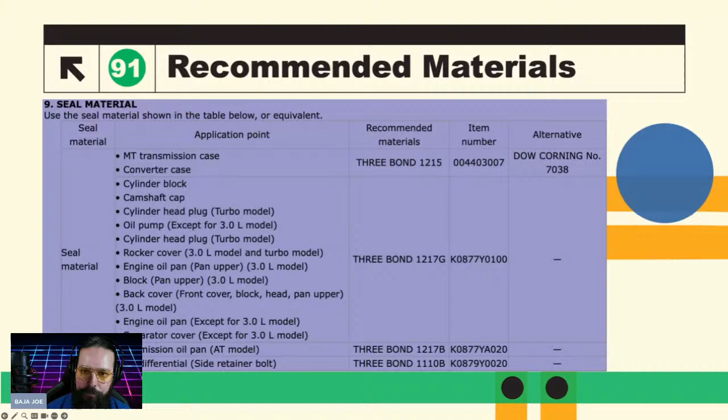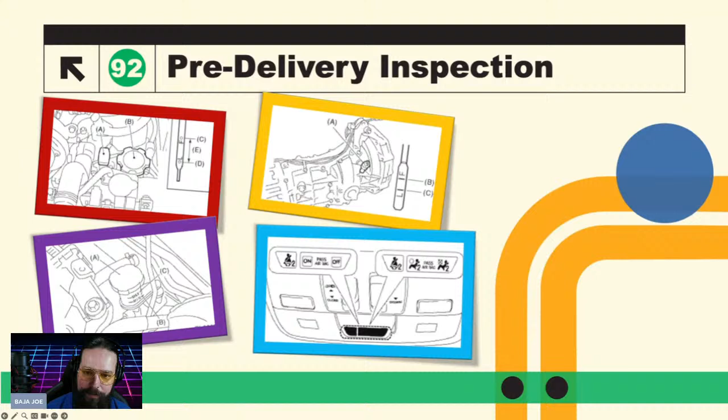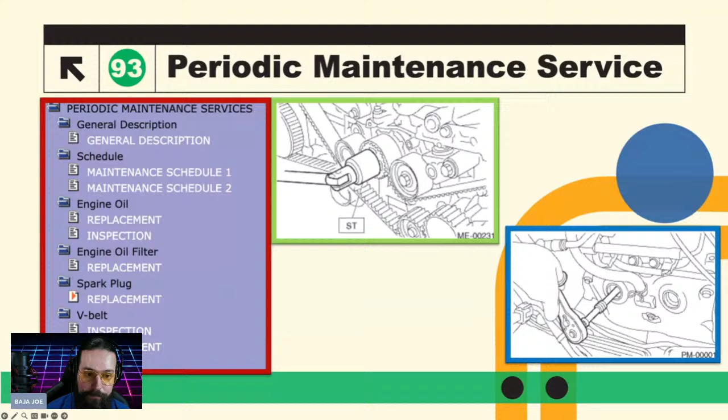So if you're a service technician, this will be one of your most used categories when you're trying to upsell something, or maybe you just don't know what services should be recommended for that car. You can skim this really quick and go, oh wow, there's a timing belt in here, it's not a timing chain. I should recommend that because the car is 10 years old and has 150,000 miles. I should sell a belt.